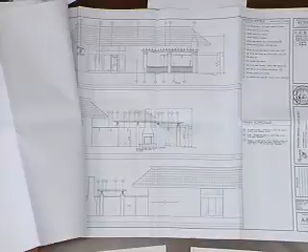The second item is exterior light fixtures are to have downcast light and no upcast lighting. We now have a downcast light. Is that a good thing or a bad thing? Maybe this was talked about. We're okay, all right.

That's a white acrylic curved face. And that's that piece right there. Yep, it's that one right there. What's the material of the rest of the fixture? Let's see if it says anything there. No, it doesn't. Socket, crossbow - that might be a question that comes up. Acrylic ivory - that's for the lens part, yeah. I was just looking for the material of the light fixture itself, but that might come up as a question.

Okay, so we'll move on. The next item: provide color samples of the stain previously approved for other trellises and wood elements in the building. Our understanding from our architect is that he spoke with landlord's architect, and the color of the wood trellises in that portion of the building has not yet been approved, so we're now working off of a darker stain, which was recommended to go darker by the ABR, so this is the color that we're now proposing.

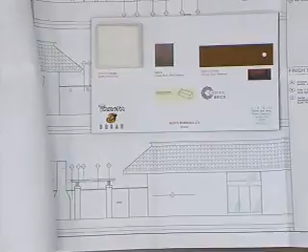Okay. And then on the lighting, it says down here, material acrylic/steel. Down here, somewhere - I'm reading it upside down.

The color doesn't really say what the color is, but okay. Next item: color samples of the stain previously approved and wood elements on this building - that's done.

Provide construction details for the trellis, showing the top members wider and shorter - they've now been made wider and shorter. They were previously 2 by 10, now they're 3 by 8 at 16 inches on center, which is what was recommended the last time we were here.

That's the secondary joist - that was the concern. And then the primary joist, how big is that? 4 by 12, I think that's right - 4 by 12 is the main runners. And then there's... oh, there's only 2. Okay, that's right.

Provide preliminary construction details for the fireplace. Consider the spark arrestor and chimney cap. If we go to 3.1, which is this one, there are fireplace details here.

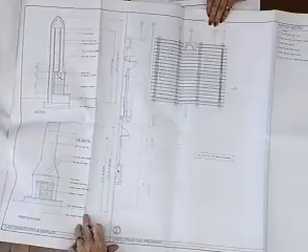Any questions? Do you have anything that we've missed on the list? I got a bunch more stuff.

Provide a color material board that includes the brick cap and pavers. The pavers that the architect is proposing is this, and the brick caps is that.

Provide the concrete step out at parking spaces - remove, I'm sorry, remove the concrete step out at parking spaces 36 and 38, so you can provide more space for planting.

Pretty much all the plans. I'm looking at that landscape plan. Yeah, that's right, okay, it's in early on. There we go, there we go.

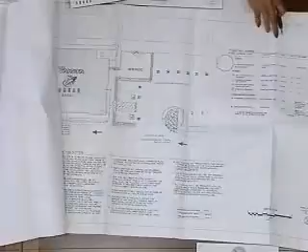Provide additional construction details for the wrought iron railing. Yep, that is also in the plans. It's off on one slide, actually - hold on.

There will be an upper corner here somewhere. Here we go, right here. Shows the sizes in 2.1, at the upper left corner.

Document existing and proposed landscaping in the existing planter at the east side. Go to the second sheet, which is the landscaping plan. There's a comment now on the box here with the pygmy date palm and seasonal color.

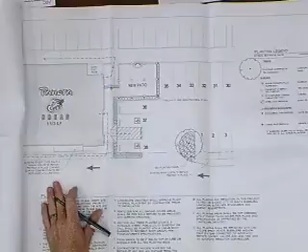The last thing is show compliance with Stormwater Management Program requirements. Right, so it's in the civil engineering plans - let's go, which is this one right here. This is grading, and then stormwater, I think it's the following page. Yeah, this is the stormwater.

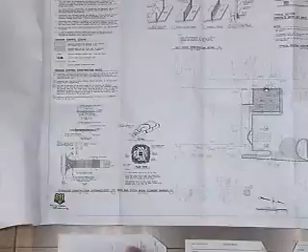Anything else you want to add to the presentation? I think this is pretty much it, in response to what you guys had brought up on the last meeting.

Do we have any public comment for this item? No? Questions from the board? Gary, do you have any questions? Chris? No. Kirk? Yes.

Since we just had a question raised, do you know where the trash enclosure is for the project? It was on the previously submitted plans, it's down kind of this direction from the space. Panda Express? Correct, so it's shared, for the complex. And it's been approved? Approved in the first phase of construction, yes.

Going through the drawings, I didn't see a lighting plan. Is there a lighting plan yet? No, there is not one in this package other than what we've submitted on the type of fixture being provided. Your fixture locations are shown on your elevations, right? Yes, and that's a correct indication of the locations. Correct. Okay, those are my questions.

Thanks, Paul? No questions. Quick question, the finish of the handrails - the guardrails rather, around the patio. You mean the railings? Yeah. If we go back to the railing details, it was on A1.1, there we go.

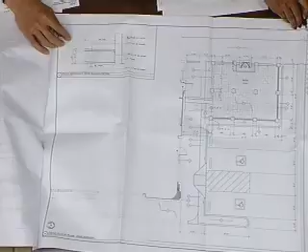Questions? The pickets are 4.5 inches apart, and I don't know what that is. That's because it's not a barrier... it's not a guardrail. Okay, it's just a barrier. Okay.

They're allowed that. Okay. Madam Chair, I have a few questions.

Go ahead, Chris. The stormwater management, can you walk us through what the provisions are that you propose for that? Let's look at it. It's section C1.2. What was your question exactly, Chris?

I'm wondering what they are doing to accommodate for the stormwater requirement. They have a couple of notes saying that the requirements, this plan shows the requirements for erosion control, and that all erosion control has to meet city and regional water quality control board stormwater best management practices.

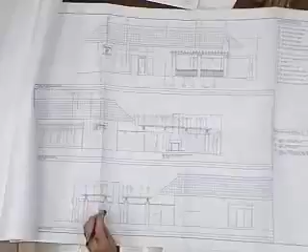Any more questions? Comments? Who's ready? Paul? Simple comment. On the light fixture itself, it's all about the finish to be Cafe Noir.

So I would just say when you turn in plans for final, if you can provide a color photograph of a light fixture, just so we know it's not galvanized sheet metal, that would address the concern that the light fixture is appropriate for the community. Okay, is that it, Paul?

Kirk? Just to tag on to Paul's comment, I got shot down about this last time so I don't know if it's appropriate to bring up, but we were talking about the light fixture as being okay, given that it's an outdoor enclosed quote unquote patio. But in fact, with the railings on two sides, it is basically exposed to the street as well as the parking lot. And in fact, it faces State Street, even though it's set way back. So I would still like to see something that speaks more to the style of the building, as opposed to being just a kind of logo for the restaurant, if that's what it is.

And then also detail 9 on the SD1, the structural details, where it shows the cap for the trellis, it looks like there's exposed Simpson brackets there.

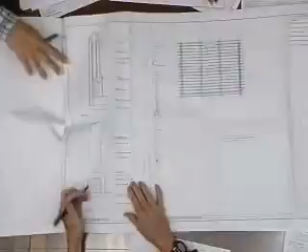All right, Stephanie? I wanted to ask about the fireplace detail, the fireplace detailing and that surround. Is that a plaster band? It looks like it, round. Let's go to the detail. There's a detail. Which sheet is that on again? It is on A3.1, exterior cement plaster trim.

I like the fact that you guys have detailed it a little bit more, but the proportions on the sides need to be a little wider maybe. We increased it from what we had before. Right, we even had it narrower than what we had on the old. And I think it looks a lot better, but I think it could still be a little wider.

I had a question about that trim - is it a square detail or a round detail? You don't have it detailed in plan, large, or... It's a square detail. It's square, yeah, it is a square detail. All right, I agree with the comments about the light fixture.

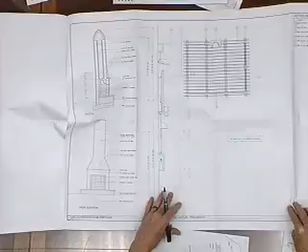I don't think you've fully resolved that yet to the board's satisfaction. Also, I think you should be really clear about where those fixtures are in plan view somewhere. You've shown them on the walls. But where did you see it, Gary, that it said located on the columns? On plan view, there's an indication that there's on the center columns. Where does it say that? Where does it, yeah, I'm there. It doesn't turn on.

At least the last time it did. Yeah, if you look on elevations, A21, on plan view, it shows them on the columns. It's on 1, 2, 3, 4, 5, A21. Oh yeah, there it is. 6. Oh, okay, so you've got 1, 2, 3, 4, 5, 6, 10, 11, 12, 13, 14.

Wow. So those are all indicated. Did the board notice all those? I noticed them last time. And they're 26 watts. It's not an issue of the amount of light, right? It's the issue of the lighting fixture design at this point?

Okay. And then I agree with the stain color. I think it should be a little darker. My opinion on the railing at the top of the wall is that the simpler the better, and I would just suggest removing that brick cap.

Removing it? I kind of got that sense from the board too, but we can talk about that some more. Who else wants to talk about that? The comment I was going to make about the brick is that if it was vertical pieces instead of horizontal pieces, it looks like it has a little more stature, and that would help it.

I look at this as just being like the inside of their store, and I think if in San Francisco or someplace where I've been at one of their stores, the color of the brick matches the color of their pavers, and it's more like an outdoor room of their TI space. But that's not what they're proposing. They're proposing that red brick cap, and then the red brick on the fireplace detail, and then those pavers on the floor.

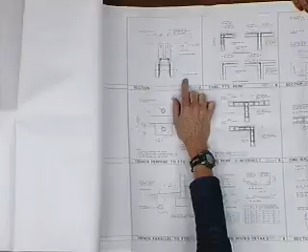Madam Chair, I don't think we want to limit them to just say let's do plaster. I think a lot of us would prefer to see a stone cap, tying in with, as Kirk said earlier, prefer to see no cap, but I think we all have our own opinions on that one. There's 5 or 6 different opinions here. I think the brick is fine because it ties in with the roof color. How many people think the brick is fine?

Sorry I interrupted you, Kirk. It's not a deal breaker for me, so I'm indifferent about it. You're indifferent too? That's the majority. I think the problem I'm having with the brick is that it's so small, and if it was more substantial...

Yeah, it's a 3-inch brick, it's 2 and something. I think, to me, that's substantial enough. But okay, you know what, we're sitting here designing this project, and we really, shouldn't we have had the bricks in the design from before, from the first draft?

But we didn't have details. So we asked for details. This is a final approval. We're trying to, the reason we're having this conversation is we're really trying to give you approval, so we're trying to resolve all these things, but it's a little too much to do. How would the board feel about sending this back to consent with just a few items to resolve, a few details to resolve? Yes.

Okay, and just to add in, it is true that I believe the brick's been on there from the beginning, isn't that right? That's what they just said. And we haven't given any negative comments, just asked to provide a detail. And they came back with the detail, it's a standard brick. So what's wrong with that now?

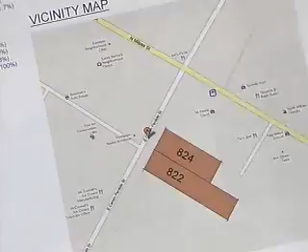Here's existing site conditions, views directly across the street of the creamery, and it's Felicia Avenue moving adjacent from our property. Here's a view of our property. You can see to the east is the commercial, almost three-story face right on the property line, and then on the other side of our parcel is an existing two-story apartment building, which we show here as well. Towards the back of the parcel, we're showing some of the existing conditions. It currently has two cottages and a carport and garage, two garages on the site, which you can kind of catch. Here's some of the old structures.

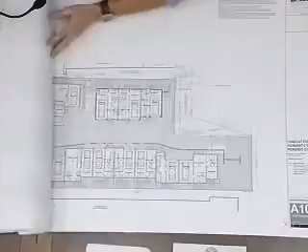And then on to the new, so the proposed development. Because of the nature of the site, the existing topography has a bit of a bowl to it. So for this proposal, and for us to accommodate Tier 3 stormwater management, we're essentially raising the site, excavating, and filling. So we have overland drainage, and we will be a retention project, maintaining and treating our own water on site. We have permeable paving, which Courtney will walk us through later. But in general, we are 12 townhome units broken into 3 buildings.

This front building, Building A, is 2 units, 2 stories, addressing. We sort of have them facing and turned towards Canon Perdido as we do this unit, which we'll see in the elevations. The second building is 3 plexes with parking in between, and this is a 3-story massing. And then the third building has 7 units.

It's longer and has 3-story massing towards the middle, and then back down to 2 towards the front. And then we actually have remassed a little bit, which I'll get into later, down to 1 story.

Let's see, refinements. The things that are distinctly different from last time were we've eliminated modifications. One of the comments from the minutes was observe the pedestrian master plan, so we have committed to that. So we fully observe the setback and the pedestrian master plan additional setback. And we also worked pretty hard with SCE to move the transformer, which they were wanting along the right-of-way. We've now relocated it here, kind of straddling this side yard setback, and provided a place for them to park, anchor, and access it.

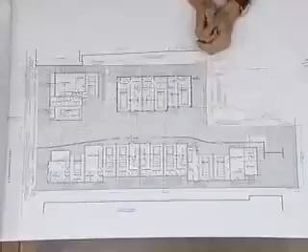And then for the units, the major changes were we moved towards a fully accessible unit. We had met the standards with one townhome unit, but we went ahead. Habitat is accepting federal funding, which pushed us towards, and we kind of thought for the life of the project would benefit to have a true accessible unit. So 1-story, ground floor, fully accessible.

So this massing changed. These two, Unit 6 and Unit 7, are now the accessible units, and because of the reconfiguring, we moved down to a 2-story here and a 1-story here. Part of that makes sense because we have a fully accessible path from the right-of-way across all these units to these 2 units, as well as the open, common open area. And in this project, we meet both the common open area and the private outdoor living space requirements.

And because of that, we moved parking a little bit. Previously, we had the accessible parking space here. Well, it just seemed a little more logical to have it next to these units. Part of the PC approval conditions, one item was providing covered parking by bike storage in the individual units themselves, but also on site we have a now covered parking area to be used privately or for guests in the back here.

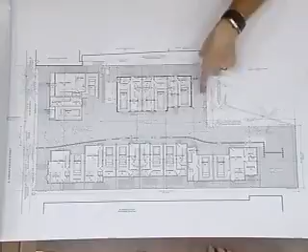Let's move to the next page. This is the second story, so you can see the second story units here, and here. And this is the roof plan of the first, and you can start to see we have placed solar panels for every unit, which is going to be part of the project goals.

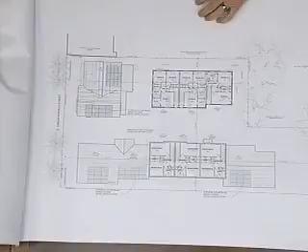We have fairly aggressive sustainable goals for this project, including 30% past Title 24, which is the Cal Green. We're going to meet Santa Barbara Built Green. We're proposing a net zero project and Tier 3 stormwater management. So solar becomes a very important part of that.

And then you can see here the 3-story massing is sort of centrally straddling the two second-story portions. This is pushed back into a corner. The topography of the existing Taco Bell parking lot is pretty high and screened with large existing canopy trees.

Yeah, okay, let's see what changed from the last meeting. One of the main comments was the original concept and sketches were a little too busy, too individualized, so we worked towards using a little more restraint as far as the variation of materials. We want a balance between individual units. This is a pride of home ownership project, but not being too busy and too Disneyland looking.

So really quickly, this is the face of the project. This is the street elevation on Canon Perdido, the drive aisle. And here you can see the language is starting to create distinct individual units. So we really came up with about 3 different schemes for the project.

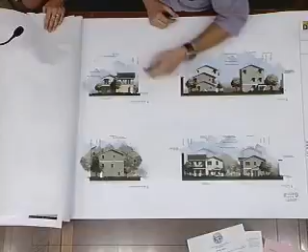So this is the front. This is the rear elevation of this building, that little 2-unit building with parking behind. And then this is the rear elevation of this. And this might describe it best. So here in our long driveway elevations, these are cut in the middle.

So you can see where we're still separating the units, but where we got a little larger massing, we didn't want to do it every single time, so we keep all the same details—siding, roofing, finish details—same as this one. This larger 3-story mass we broke into two. We didn't want to get it too vertical and too busy.

Essentially we have about 4 color schemes, which is reflected in the other building as well, and the details will match. We've employed these little covered entries, gable covered entries, in a few locations, and everything else gets a pretty standardized shed.

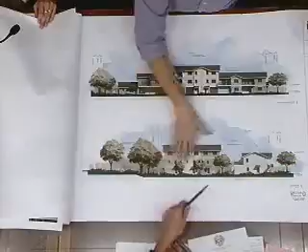Is this all one plane? Yes, this is the back of—this is the Milpas elevation. I understand, so this is all one plane. And then this is all one plane except at that location? Just for the board to understand.

You're just staring here. So yeah, the 3-unit building is one plane in the back, and then it steps. Two are in one plane, and we step back about 3 feet for that 3rd unit. Here we have quite a bit of movement, adjacent to the neighbors.

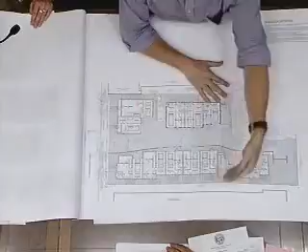So we do have a little bump out here in this circulation core. This is parallel, and then we break it a little bit. And then against the neighbors, we have a couple of moves here. All right, let's keep going.

Is your 3rd story in essentially the same place that it was the last time you were here? Yes. The only move we made on the 3 stories—well, we actually reduced it. Let me show you.

This was probably the biggest massing change. We were previously 2-story and 3-story here. Because we remassed, we nudged into that open area a little bit, but both shifted down. So we have these 3 as the 3-story.

So this is that 3-unit building from the driveway looking at the front doors. This is the one that stepped back. This is the side of that little 2-story towards the front, and then this is the view from the neighboring apartment building, essentially.

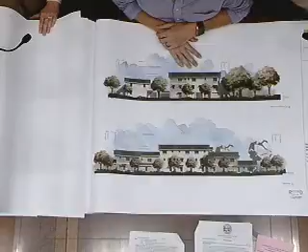Go ahead, and then I'll let Courtney do landscape.

Hi there, so I'll just run through our plan quickly since we're not at the first presentation. Basically almost all of the paving is permeable. We're looking at using an Acker-Stone paver, but haven't decided yet.

We have a fully accessible ADA route that will be delineated from the vehicular way with either color or texture or a combination of the two. We have a small common area at the rear of the property with a small tot lot for younger children, and a small community garden area with DG paving, picnic area, barbecue, and raised vegetable garden beds. This whole area will be enclosed with a low 4-foot-high wrought iron fence for safety.

And that's where we have our green waste in the back. Each of the backyards will have a small concrete patio, small planting area, and at least one small tree per yard. And Ryan mentioned we have covered bike parking.

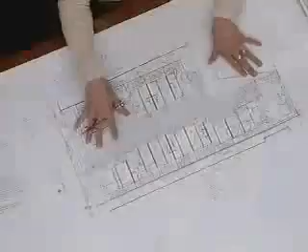What about any existing significant trees? I was just going to go over that. So this is our tree protection plan. There's a total of 20 existing trees on our property, most of them in poor condition. We'll be relocating 6 of the 20 and removing 14.

2 of the 6 are oak trees, so we'll be preserving and relocating those. The other 4 are fruit trees. Another great component of the planting plan is that we'll have a lot of edibles for the residents. That's it, thanks. We have one public speaker, Kellum DeForest.

Good afternoon, Kellum DeForest. When I saw the plans online, my concerns are: how does the project meet neighborhood compatibility? Right now, most of the structures in that block, except for the apartments, are one-story cottages dating from the 20s, or maybe even earlier.

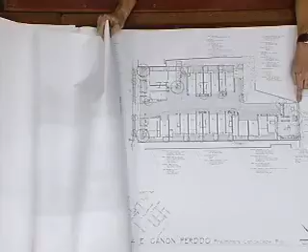Here we have an existing retaining wall that holds the parking lot above, and then this is landscape. There's existing retaining currently around these two sides, again because the existing condition is so low here. We'll be retaining up against that, but very minimal, which we can bring in. Similarly, you can see here we're adding a second step down just a bit against the existing wall, because it's pretty hard to construct up against existing retaining walls.

So these essentially disappear - we get to grade with our neighbor here, even though we are retaining a little bit. Here we step down a matter of a few feet, I think 3 to 4 feet. This is a low retaining wall as well, but mostly disguised by landscape. And this one, we're going to try to cut about in half - from about an 8-foot difference, because we're grading up, we're getting it down to about 4 feet of slope, but we're pushing out against it. So it's 3 to 4 feet.

So if you had to retain along that side, if you didn't have an agreement with your neighbor to fill in there, the retaining wall would only be 4 feet high? We would retain to a curb height, then fence it, and there's just this funny wedge-shaped gap between our retaining wall and fence and their retaining wall and fence that no one uses. Did we get that agreement? It's on its way - most likely we'll be pushing up against that.

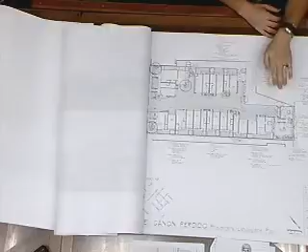Any more questions, Kirk? No, thanks. Paul? What's happening right here grade-wise? Is Taco Bell higher than your property, and does it slope down to here? Is there a fence being proposed along that line, or what's the topography? Yeah, currently there's an extreme slope, 6 to 8 feet, where Taco Bell sits up here. They retain, and then this is a steep slope down.

So we're up at about 26 plus here, as you can see, getting down to currently 19 or 18. This is sort of a low point. So this is showing proposed conditions. We're lifting the whole site up 3 to 4 feet, so there's about a 4-foot difference between the Taco Bell parking lot and this slope down.

Do we have a proposed fence there along the property line? Proposed, yes. I think for some reason it's not showing up on this plan, but there is a wrought iron fence proposed. I think the question was whether there's enough landscaping between the property line and this paved area that would be physically on your property. I believe so. That area in particular, previously we had included it on the plan. Now it's no longer part of our property, so I'm actually not sure.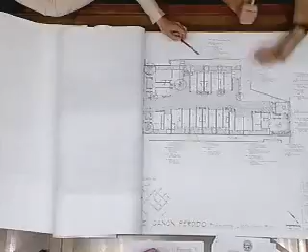It was interesting, we discovered there's a third parcel here, a 3-foot swath along this property line that was neither of these properties nor the Taco Bell property. Habitat is working to attain that parcel, and it looks like it's moving that direction. So we're currently fencing, but we will gain, as you can see here, another 3 feet of property where then we can landscape and move that fence.

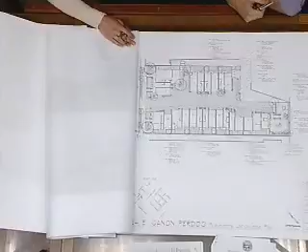I wanted to point something out to the board, whether or not there would be a need to have an ADA path going to these front doors. You're saying no, but we usually like to have a delineated path of travel for pedestrians coming up from a sidewalk. So I wanted to point out that they didn't go across this coloration, and that this area also was all one color versus having that as a ribbon sidewalk, both on the paved portion. I want to point that out to the other board members.

Any more questions? Keith? Stephanie? I had one question. What is this again? That's just basically a header of pavers. So it looks like a curb, but it's not. They will be flush, and it's just basically an edge band around this field of pavers.

So is this the same paver as on both sides of it? We haven't decided yet. It's definitely going to be a different color, potentially a different pattern or paver model. Still haven't gotten that far. We picture that being almost like a poured curb, and then on either side could be different pavers, or it could be concrete, so it really stands out.

And what's that for again? This was part of delineating the pedestrian path. We had a lot of conversations with the building department. I had a couple meetings with them regarding this path, so there's been a lot of work put towards it.

So you have to have a delineated path? Yes, it has to be very clear, the separation or delineation between vehicular and the accessible route.

Quick question, do you need to get into the whole detectable warning separation? Are you still messing with that? It's yet to be determined. We're getting pushed that way, but we're not there yet. There's some gray area as far as interpretation about minimums, and depending on when we get into the building department, there's a lot of pushback on those. We might see those being pulled back significantly, but we're still working through that, potentially.

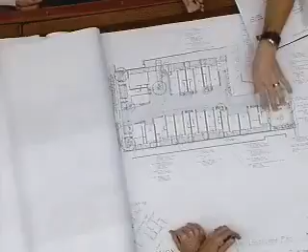And the only reason you have to do it is because your accessible unit's back here. If it were up here, you wouldn't have to have any of this. No, it was irregardless. We would still have to provide that because of the playground? Yeah, I mean yes, okay, because we had a common open area. The trash enclosures are all in the individual units, they're right? Townhomes, yeah, so they each have their own. Any more questions?

Madam Chair, one other question about the solar panels. It looks like all these, the ones I'm concerned about face the neighbor to the south, or I guess to the west. Yeah, and it looks like all of them are at the second floor. Looks like all the solar panels, for most of those units? There's 3 arrays that are on the 3rd floor of that building. Yeah, if I may finish my question - so it looks like all the ones at the second floor are above the roof plane of the adjacent apartment building. Is that a correct assessment?

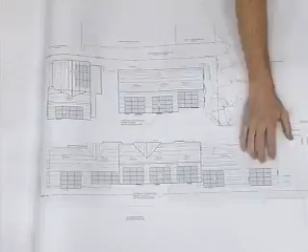So the second story, each unit has their own panel, so we had to be careful. We couldn't be sharing roof space because these are homes owned by the people. So each unit has a panel system we've already modeled, so it's going to be pretty much this size. So yeah, the second story elements to that adjacent neighbor, we're matching heights more, pretty darn close. The eave lines are matching? Yeah, so our first story massing is nearly identical to the neighbor's first story massing. So yeah, the eaves are matching, so whatever you can see up on the pitch could be visible, yes. And is there one that's located on the first floor roof? Here, in the back, yeah, in the back. All right, thanks.

Comments? Stephanie? Do you want me to start with you? No comments? I'll dive in.

Go ahead, Keith. I think the project's improved quite a bit since we saw it last time. I think the changes in the massing are good moves. We still have the 2 stories to the street. We have the street-friendly entries and porches to the street. I think the simplification of the architecture is a positive thing compared to what we saw before. I think the landscape looks very well thought out. Appreciate the reuse of as many trees as possible. I think the project's ready for project design approval. I would like to see the second floor balconies studied further - there's a number of them that seem a little too long and horizontal, out of proportion with the more traditional architecture. Yes, and I'm sure you'll work through the paving design, but look forward to the development of that, and as Paul pointed out, providing the delineation of paths to those eastern side units and working through your whole pattern there. But I think you've made a lot of good moves, and it's looking like a good project.

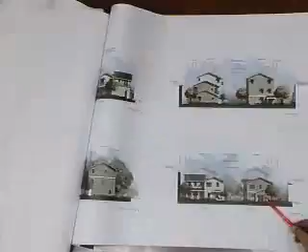Yeah, I would say I'm enthusiastic about the project. I think that we're all happy with the massing. I remember there was some discussion about this unit right here, and I don't think it's quite there as far as neighborhood friendliness towards the street. The side lights and the door, I don't think that matches the character of what you have here, and I think this needs a little bit more work.

And I do have some concerns with the third-story element. I noticed that the center floor is at 9 feet, and we've got a 9-foot plate height here, and then we're back up to an 8-foot plate height. Most of this is garage area, and I was wondering if we could reduce that a little bit. I would be more concerned with this unit right here. Both of these elevations seem a little plain, and so does this elevation - it's repetitive lights, except for this one here.

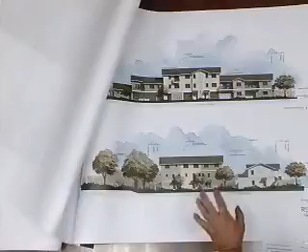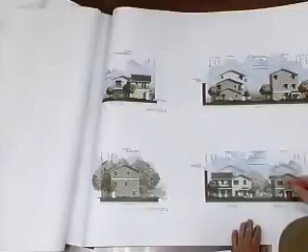So I'd like this particular unit to have a little more articulation, especially in this area here, where you see it from the street. I know that we kind of grade it in, but in reality we're going to be seeing this 3-story massing right here - yeah, from Milpas. And also not just from Milpas, but from Canon Perdido Street, we'll still be seeing some of that massing, are we not?

No, we're not. Let me get one - yeah, go ahead, turn to it. So here's the 3-story massing. This is not the face we were looking at - we're not going to see any of this face. Oh, sure, I thought you were talking about Canon Perdido Street. Oh yeah, here, yeah.

So we're going to see some of that massing from there, which is going to make the front units look kind of big, so I was hoping to get a little bit more articulation. It's not in the set - as part of Planning Commission we did story poles, and then we did photo sims based off of those, which I can walk through.

The story poles are going to address what Gary's concern is, actually. He's talking more about the articulation of that.

I'd like that 1-foot reduction if we could get it, if the rest of the board feels okay about that reduction. But I also would like to see either the fenestration moved, not so tight up against the corner, so it brings a little bit of this blankness away.

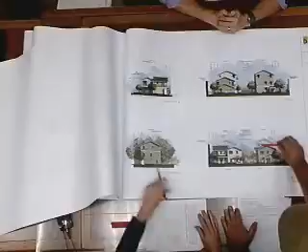Sure, or this one's probably okay, but I was more concerned with this one. Yeah, that's the single 3-story unit.

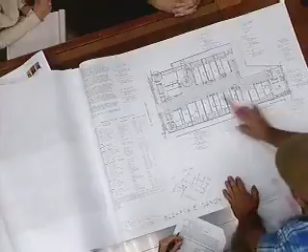And then the other thing, this is more of a pet peeve, but we don't really think about this. When we look at the project right now, there's no way around this, but we're going to have a bank of meters which kind of takes away the landscaping. We have 12 units right here, and we're going to have 12 gas meters, with very little landscape pockets, and all of a sudden we're going to put 12 gas meters in front of these units. Can we think about where we're going to put those meters, not taking up landscape space and not being visual from the street or something like that?

So I was hoping you'll be able to think about that, not using the landscaping, not visual to the public, and putting them in a place either centrally, so they don't have to come to each unit to check them.

And the same thing with that backflow device. Think about, you're going to fire sprinkler this, right? Yeah, because it's so far back. Think about how large that backflow unit is and where you're going to see it from the street, and if we need to hide it a little bit better, or run it parallel to the fence line or something like that. Think about those things.

I can probably respond to all those right now if you'd like. Okay, sure, if they're on the plans. If they're not on the plans, then we just want you to address it. Yeah, we're really behind, so I can have that responded to in 30 seconds or less.

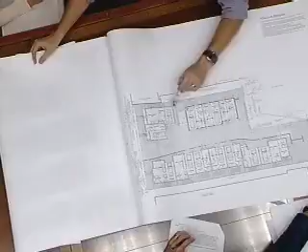All the utilities are located behind Unit A. Electrical and gas are all banked and screened on this wall, and we'll screen it here somehow, so we're not going to use up any additional landscape. Fire closets are tentatively placed, we have a fire closet for each building, and we've reduced as far as we can until we develop that further.

And plates, yes, we have a little bit of wiggle room. We just wanted, as structure grows, a little bit of space, but Planning Commission said the same thing, so we'll reduce as we can.

You're showing planting in that area where you're going to put the gas meters, so you might want to take that planting off. Coordination. Yeah, we need to coordinate a little bit on that.

All right, just to wrap this up, I agree that your plans need to be really clear on the site, on the retaining walls on the property, and I think your site section is going to address that. Actually, that is a requirement for project design approval.

So you don't have a site section? We did last time, and we show the sections in the elevations. It was hard to read. It gives you something, but no, they're not as clear as they could have been.

Go to the front one, that's the one we show biggest, context for both buildings. So starting at the front, just for context, we're showing this is the existing third-story building. This is the existing second-story building, and it's hard to see because we have this grounding color, but it shows the existing grade versus the proposed grade.

But where's the grade? This is a two-story commercial building, but didn't you say there was a sloped portion back here? Yeah, which we don't have in this set, unfortunately. Okay.

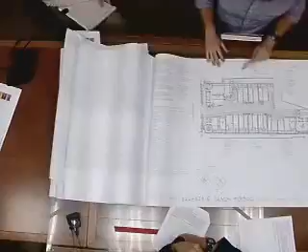So that's going to... I don't know how important that is to the board right now, but I think it's important at some point to document that. And if I might add, for what it's worth, all the retaining and fencing is at grade or the maximum curve. We're talking about an inch or so along this line. There's nothing here. Yeah, we understood that. It was this one that I think we're the most unfamiliar with, trying to remember, because we've seen this project.

And maybe I'd like to clear up one more thing. All the progress we're making with the neighbors, I suppose, cannot be a part of this. I wanted to give you insight, which will most likely move that. But for now, we're proposing what we do own, and that's, I guess, what we should be ruled on for now.

That's helpful. Thanks, Keith. And I agree with the comment about softening that wall with incorporated landscaping. I think that would be really nice. Otherwise it's just going to look really barren. There's not a lot of landscaping on this property. We're talking about that back 3-foot corner strip in that area, where you have that 6-foot high wood fence proposed around there with no landscaping up against it, which segues into one of my comments about the lack of landscaping in those private spaces. If you could just put some vine pockets on there, people might not think about doing that, but if it's in there when they buy the unit, it might be kind of nice.

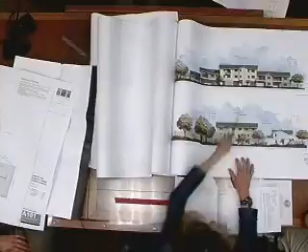I had to agree with Gary. I'm not going to tell you what to do there, but I also agree about the resolution of this portion, particularly where you have the same plane with this kind of vertical band and then a horizontal band, and then back here this all being one plane. I think the third-story balcony is going in the right direction in terms of breaking up and providing some relief, but I don't think this is quite there yet. I don't think it would necessarily affect project design approval for me, but I think this isn't as nice as it really could be at the end of the day.

So those are my comments. And would anybody be interested in making a motion?

Madam Chair, I'd like to make a motion for positive comments, but have them come back to full board for project design approval with the site sections that are needed and the resolution of any other easement agreements, in particular that 3-foot area that nobody owns, because then we know whether there's going to be landscaping on your property or at the edge of the paving. That's important to know because that will dictate the width of your building. And the grading and retaining walls, that's quite basic. And the floor-to-floor plates - we're not saying we don't like what you have here, but we need additional documentation that you know you can achieve it when you start doing your working drawings.

Are those your comments? That would be your motion? That would be my motion, in addition to study the street friendliness of the western front building - that's on the west side, Unit 12. Definitely address the plate heights, reduce where possible. Add additional vine pockets at fence locations, and provide pedestrian access, or wayfinding, to all front doors.

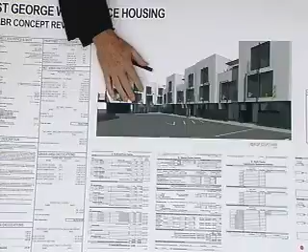The area that we need to take out of the site to accommodate the Sycamore Creek setback takes about 40% of our site. If we do a calculation based on the yield for the apartments, we get to a calculation where with the gross area of the site, we could have 16 units. We're proposing 15 units, a combination of 2-bedroom, 3-bedroom, and 4-bedroom.

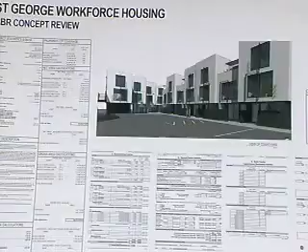The parking calculation - when we came in before, we were asking for some reductions in parking. Now we're asking, everything is per city requirements. We've got 2 parking units per unit, plus we've got 4 guest parking, which is 1 per 4 units, and we have 15 units. So we have 34 parking spots. We're not asking for any modifications on anything.

The only thing we're asking for is consideration from this board on a landscape strip along one of the property lines where we have parking. There's a 5-foot requirement, we're asking for 2 feet, and we feel like based on the fact we're giving 40% of our site to landscaping, we're hoping this board could see that it makes sense to make that shift.

Go to the site plan. For those who aren't familiar with the site, this is on Indio Muerto. Indio Muerto runs across here. Our site basically takes up this whole chunk of property here up to the creek, so it's a site like that. These buildings are being removed.

There was a request from the board to show more photographs of adjacent properties. This is showing adjacent properties. One of the significant design constraints, besides the creek setback, is that due to that setback we're required to group the project in this corner, basically. And in a sense, we're mid-block, so we don't have a structure that's closer than maybe 90 or 100 feet to the street in any direction, which you'll see on the site plan in a minute.

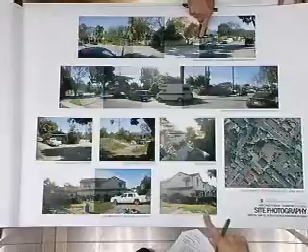It's kind of hard for me to tell the orientation upside down. Sorry Robin, could you indicate where your driveway is going to be on the street view? I'm looking at this upside down. It's roughly here - right about here? This is the creek bridge right here. Yeah, that's the creek bridge. Yes, right in here. And is that front wall going to stay, that runs across? Yeah, right where your finger is.

No, you mean this, whatever that is? No, that's all - no, that's coming out. Any questions? I'll move on to the site plan.

So once we've determined, working with the city, we determined this 50 feet from existing top of Bank Creek, which is a calculated top of bank, which is back here. You can see the kind of chunk of property this takes out of us here.

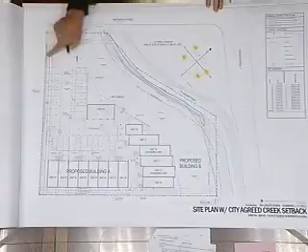And in doing that, this 2-foot interior parking setback, this is where I was talking about where the typical is 5 feet, and we want to take that to 2 feet. We still want to get landscaping in there, obviously. We want some kind of buffer along the fence here, but we'd like to shift that back a bit.

Excuse me, Robin. And that occurs along the edge here? That's right, that's where we keep this. Then you come onto the site.

We've got 90-degree parking on both sides. Come into here, and we've kind of grouped the structures around a courtyard here, basically. We've got 4 covered parking here with a 2-bedroom unit on top here. And then we basically have townhome units.

Here we've got 8 in a block here, and we've got 1, 2, 3, 4, 5, 6 here, and the 1 on top there.

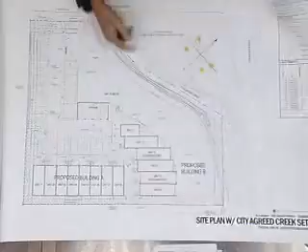The units, like I said, are townhouse. Let's go to the lower floor. Typically living area on the lower floor, and then go upstairs to stacked bedrooms up above.

This is as you're working up through the project. Second floor, all 2 bedrooms on the second floors of the townhouses. This is entry into this 2-bedroom unit here, entry into this 2-bedroom unit here. And that goes down to the bedrooms from there.

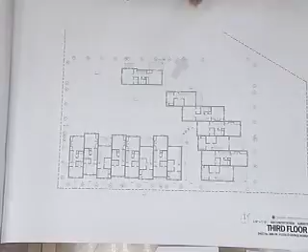And then the top floor, we're typically 3-story, the variance being some units are 1 bedroom, some units are 2 bedrooms, and that's causing a variation in the massing of the blocks when you see them from different angles.

We did generate, if the board's interested, we did generate a model of the project. And it might be helpful just to take a look at it for a second, so you can kind of get a feel for it. Now, why don't you orient it 90 degrees? Yeah, like that.

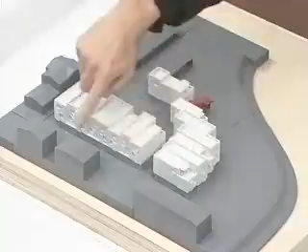This is actually a 3D print from our 3-dimensional model. And this is where the street is here, and this sets back here. This is the Housing Authority project. This is their parking that comes back in here. These are the rental units that are on the back here. I think we're pretty accurate on the heights and so on, and the location I think we're right on in terms of using Google Earth and so on, and what data we could get from surveys.

Grading-wise, I want to bring up to the board that it's being proposed by the civil engineer to basically raise the site 3 feet. Gets us out of a floodplain, being right on Sycamore Creek. We need to do that.

What that means is it's actually we have a 3-foot retaining wall on the back edge of the site here, not showing in the model. But the grade comes up about, I believe it's 2.5 to 3 feet to get up to that 3-foot retaining wall. That comes back here and then declines here as it comes out to the street. That gives us positive drainage out to the creek and somewhat to the street here.

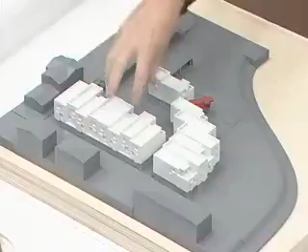And we are looking at covered parking here, or carports rather here. This is the 8-unit block here, another unit here. You can kind of get a feel for what we're trying to do, is step back here.

You can actually see the project from the street here. I'm sorry, I forgot the name of that street. Soledad, was it? Soledad, yeah, thank you. Soledad comes here. When it comes out here, it actually can see the creek, and we'll be able to see across here. And as you come up Soledad and hit Indio Muerto, you won't be able to see it because of the residence that sits here.

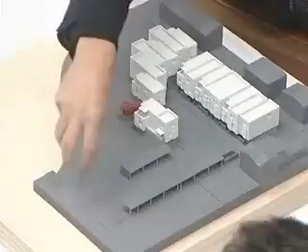As you come along here, you may be able to see it from the street, depending on our landscaping. We want to keep as much of this existing mature landscaping that's here. What we're hoping to do is kind of create our own little courtyard sort of world back in here.

Go to elevations, unless there's a question about the massing. No. Thanks for the model. That was great. You're welcome.

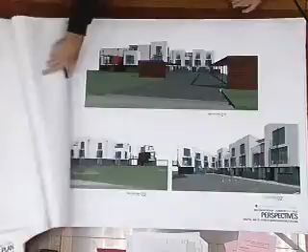This is a view from, we're calling this a view from the creek, but this might actually be Soledad. You might more or less have this view. We are looking at doing a little view structure over our creek setback and landscaping. And this is a view inside the courtyard as you drive in and bear to the left, looking at the other units.

There was a question about some of the window treatments at the last meeting. We're at 8-foot plates on each floor, and we're looking at sliding glass doors to get as much light as possible into the units. We're looking at doing a screen detail in front of one of the windows. The slider that slides back has a colored glass piece that provides a guardrail. It's kind of a typical window motif that runs throughout the project.

We are looking at plinthing the project with a different color in the plaster and the base. These are little walls that create porches at the entry of each unit, with landscaping in here. Chuck will talk about the landscaping, but I want trees with a canopy to fill in and shade, possibly deciduous, to let more sun in during winter.

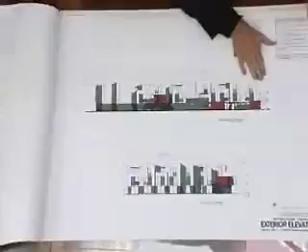These are elevations taken not building by building, but by the project. This is the elevation facing Indio Muerto, which we're calling the north elevation. The east elevation is the one facing towards Soledad Street and the creek.

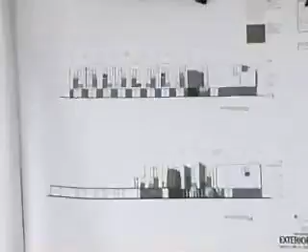The west elevation is towards, hopefully towards the west, sort of southwest, the Housing Authority project. This is the elevation facing the units in the back — I think of this as the back elevation that has the rental units.

And then these are inside that courtyard — the different elevations inside the courtyard.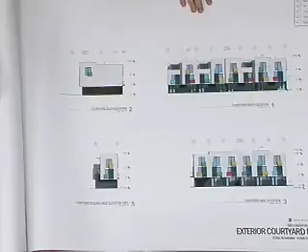This is the grading plan. This is the retaining wall being proposed here; it steps down as it gets back here. This is pretty much showing positive drainage back off of here.

Paul brought up the accessibility issue on the previous project, and I think we're going to have to work in an accessible route through here, basically across here. We have accessibility from the parking without any trouble, but from the street we're going to have to work out some compromise with the creek setback and the paving for that.

This is the conceptual landscape plan. Here's the creek setback line, and everything out here — well, we've got a bunch of exotics and invasives in the creek, so everywhere on our property we're going to renovate and do a creek restoration, which is a good thing. Everything in this whole zone is riparian, native to the site.

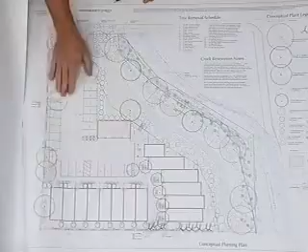We're trying where we can to save the trees. Some aren't savable or appropriate. There's quite a number of palms, so we're going to harvest them and make kind of a statement there. Species of tree 1 and species of tree 2, just for some variation.

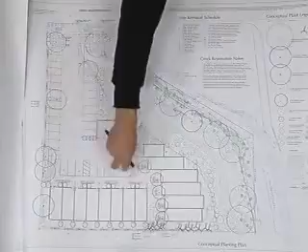Pretty simple. We want to get some kind of taller tree in here, and something taller canopying back in here.

There's a small stone seat wall, about 18 inches, and a decomposed granite walk that'll allow people to venture out into this area. This is us floating a proposal — the creek folks really won't talk to us until we float a proposal.

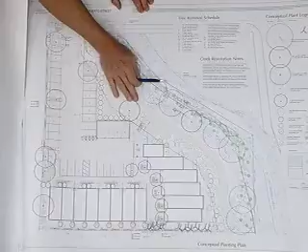So this is our float, and then this is a buffalo or Carex grass — not a refined lawn, but more of a coarse lawn. We think people could come out, sit on the wall, walk, and kids could play.

By the way, I just saw something that Chuck presented that reminded me. He's calling it workforce housing. The developer really feels as though in this area he's trying to create an affordable by design, in a sense, rental project. And so we've endeavored to do something design-wise that was simple, yet still had some life to it and was kind of fun.

But it is in an area where he feels like there isn't a predominant style or a predominant sort of look to the neighborhood per se, but feels the compatibility will be in how people live in this place, having their own kind of zone to live in, creating this idea of a courtyard that kids can be out in and people can keep an eye on it. That's part of the reason the units are organized on the bottom floor, where the living areas are down there. So I just wanted to add that as one of the thoughts behind the project as a rental project.

All right, thanks, Robin. We have two public speakers: Kellum DeForest, followed by Ken Bortolazzo.

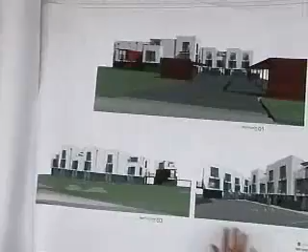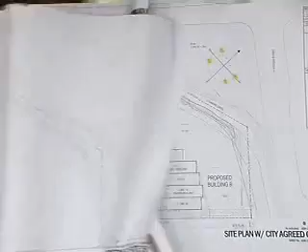On the survey, the original survey. Let's see. Here's the outline here, Gary, of the Housing Authority, but it's showing nothing here, Robin. Is that true? There's a home that sits here, right about here, which has its side yard setback. And on the Google, it's right here - no, actually it's this one. Oh, I'm sorry, there. Yeah, these are there, the ones coming out. And then it's backing up against the parking for the Housing Authority project, and then the back is kind of the side, I guess that's their back setback of the Housing Authority project.

And then your parking will be raised. It varies, it probably starts to slope up. It gets, probably the parking gets up to about maybe 2 feet here, gets up to about 3 feet back here. Okay, because I was seeing a 3-foot retaining wall with a 6-foot fence here, making it 9 feet on the other side, but that varies. It varies, but maxed out at 9, I would assume. It may be the case, I don't know for sure. Okay.

If I could just tag on to that question - so is the front end overhang into that 2 feet? In other words, is this a curb that acts as a bumper for those cars? That wouldn't be cars that go wheel in - bumper, wheel bumper would be farther back. Yeah, we have the dimension here. Okay, there's 18, I see it, thank you. Okay, all set.

And then, I guess you sort of alluded to it earlier about the possibility of being able to use this area for pedestrian use, and you're still looking into that, it sounds like. We're hoping that's the case. Okay.

I have a question, as I missed your description on the elevation. Can you describe the windows again? Is this a movable shade or a permanent fixed one? That's a fixed shade. But this window opens, and this acts as a guardrail? Right. So what is this made of, this material? Oh, over here, he wants you to point it out, Stephanie, on the screen. Oh okay, I was trying to find it. And your mic's on—what is this material? That material, we're thinking would be a tropical hardwood that we'd let go gray. Basically a wood, we'd like to introduce a wood. And how far out is it from the glass? It floats about 4 inches from the face of the building, probably about 6 inches from the face of the glass.

That's it? That's it? All right. Comments? Who wants to start? Gary, you want to start?

Basically, I'm not really a huge fan of the international style, but I have to say I think this complex is quite handsome. I really do like the architecture on it. I think there's lots of details, and there's some whimsical elements with that skyway you have up there, and I really am enjoying it. Normally this wouldn't be something I would even entertain, but I really like this project a lot. I like the design. I like that it is somewhat hidden from the public, and I really do believe it'll be enjoyed by its users. I'd like to see a little bit more detailing on the trash enclosure.

I think it needs some type of trellis element or more details on the trash enclosure. I'm worried about the outdoor living space. If you're not allowed to use the creek area, I don't think there's enough space for kids to play in and shoot each other with BB guns and so forth. It's important to me that this area be able to be used for children. Otherwise there really isn't enough space for something so family-oriented. I would comment that maybe you should incorporate some children's play area into it, with some type of play equipment or something like that. I think that would be important.

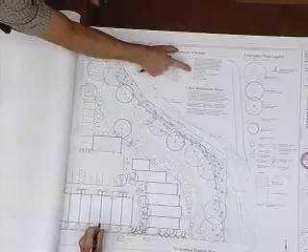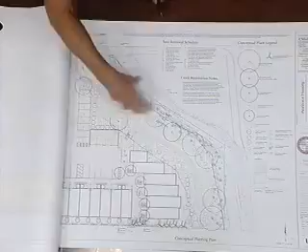So are you seeing that I've got these other trees kind of cheating them out? Or no, I'm just wondering where they are. Oh, I see that, 23 is right there. Oh, yeah, there we go, good mass. You need to point it out over here. Got it, Chuck, he can look at it on the screen. There's a pretty good massing of trees in here. You're right, I should probably move some of these away to let them have their space.

Okay, great. Thanks. Okay, Kirk? Thank you.

Yeah, it's a nice project. I think for the repetition of the units that you've got, the play that's generally happening on the elevations, I think is really nice. And the fact that you do have this very large open area for the use of the residents, I think it's a big plus for this project and the way it's set back from the street.

I think my one concern is really that south elevation, and whether there are visual impacts back here or sight lines that might justify getting some more variation and relief to that south elevation. My suggestion would be to come back with evidence that either that's not really an impactful elevation because of parking areas or what have you back here, that it can't really be seen well from anywhere, or whatever the reasoning is. Or, if there are impacts to look at, provide some relief, greater relief on that elevation, similar to what you've done in other areas, particularly along the creek.

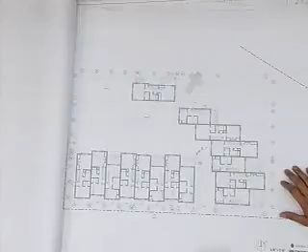I know it's in the middle of the block, but that's the only real concession I think you need to make from my perspective. The way the mass is, how far it's set back from the public streets, the amount of open space you're providing is tremendous. The 2-foot landscape zone is understandable due to the 40 or 50-foot setbacks. So it's a great project.

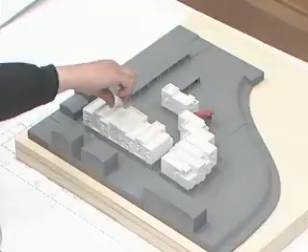So I think more of these large insets along these edges and stepping down adjacent to this area, and more study of the fenestration on these side walls. It's sort of extruded and cut off, particularly where the steps are.

I'd like to see more articulation there, and architecturally, in that vocabulary with the exterior detail and articulation, I'd like to see more of the horizontal shading elements you show on some upper floors, maybe on other elevations, just to provide more relief, more shadow. I don't think there's enough of that at this point.

And I concur with Kurt's request that we see some kind of 3D views from the context, to get a better feel for how it sits in and is viewed from the public areas - from the street and from this area here.

Stephanie: I would tend to agree with the other board members' comments about relief on the side - Stephanie, your mic's not on, I don't think - using some of these elements that you used on the courtyard side, on this side, to provide sunshade relief or whatever.

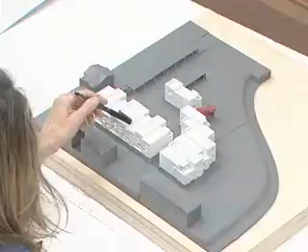And I think you might get better use out of somehow flipping that plan and getting a south-facing, more sunny balcony. It would also help with the massing of this elevation as well. Just a suggestion of a way you might be able to do that - I'm not sure exactly how, but I agree with Keith as well.

This elevation and this elevation need some relief. They're close to their neighbors, and it's a three-story volume.

I think that even if we don't have to see story poles - is this a planning commission? No - so it may be a 3D model photo montage of what it would look like from Soledad, if we don't do story poles, something that would show us what it's going to look like, because I think the landscaping is going to be able to provide a lot of relief.

I don't necessarily think that this style is incompatible. I think because of the isolated nature of it, and so many styles in the neighborhood and various sizes, I don't think it's necessarily incompatible, but I would like to see what it's going to look like from the public views.

I agree with the comments about bike storage, the planter seeming fine and just planting it appropriately, and the usability of the creek and providing a usable space for children to play because of the number of families that are probably going to live here. So that's really all I have to say. I like it.